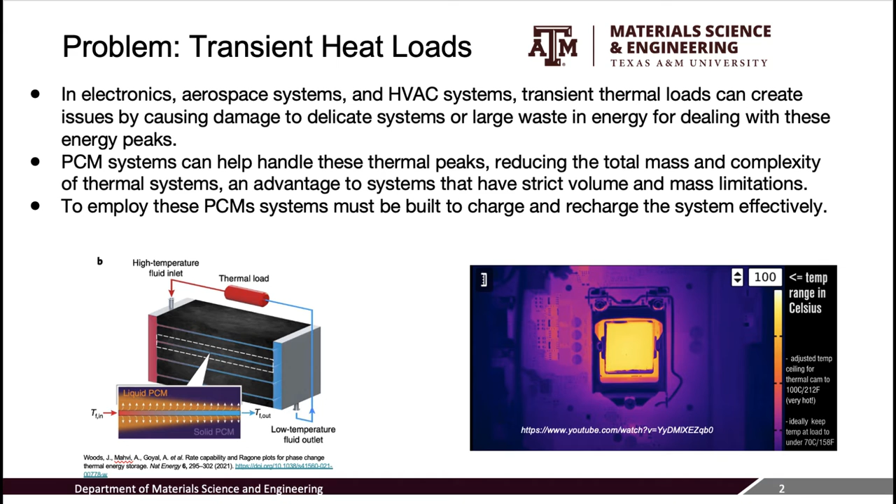We will be using the Thermal Energy Storage Module, or TES for short. It will be made of PCM composites, which are good for dealing with unexpected heat loads as mentioned previously. They are capable of absorbing excess unnecessary heat and releasing that heat when the system doesn't need the entirety of its cooling capacity. We are expanding on CITMAV's initial work on the storage unit and simulating optimal conditions in a much shorter time frame than physically building the module. We have much more room to change the variables often to optimize our results for a variety of different circumstances.

It is important to mention that we are just working on the TES module of this whole system, which is shown in the red box. The image on the left is a real-life model of the image on the right.

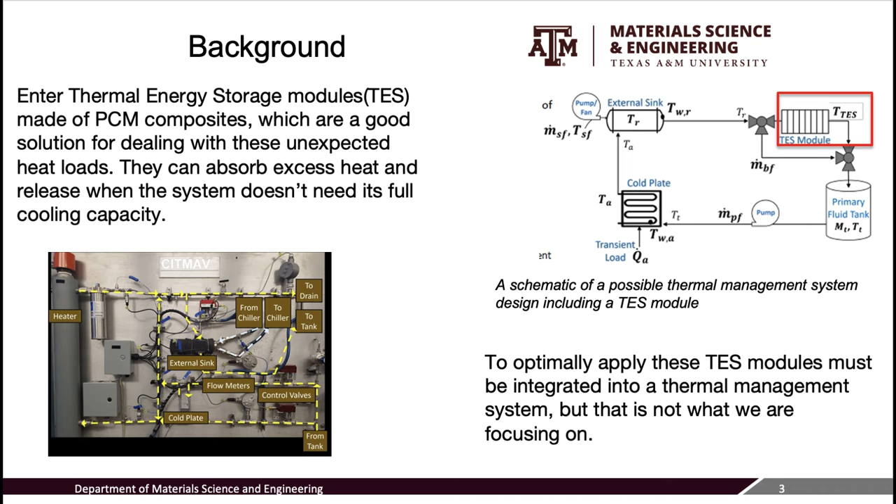We will be showing that there are optimal designs for these modules at specific timescales and heat loads. By designing with optimization in mind, we can minimize wasted resources.

It is also important to mention that the image on the top left is an example of the model we are planning on creating, including the metal fins in the fluid channel. These metal fins absorb heat particularly well as they are made of conductors. This helps move the heat into the system efficiently.

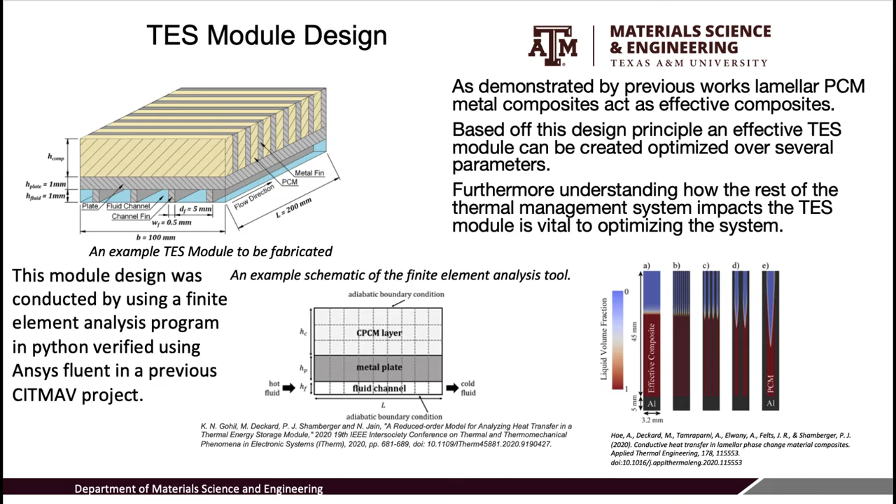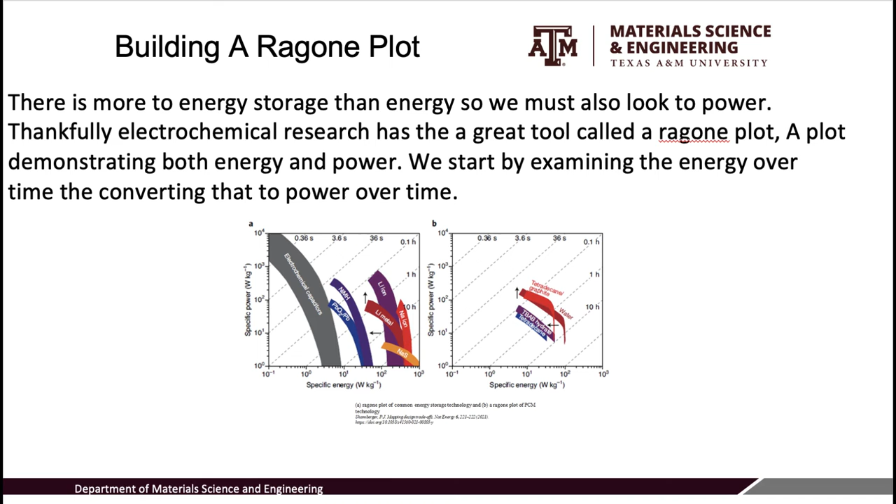An essential part of optimizing our system is understanding Ragone plots. Our system has more energy storage than it does energy being put into the system, so we must also understand and visualize the impact of power on our system. Ragone plots give us the ability to look at the relationship between energy and power easily.

This is the list of our conditions for our initial system. We started out with hexadecane as our PCM and aluminum as our metal conductor. It also has a flow rate of 0.2 kilograms per second and a difference of 5 degrees Celsius between the melting point of hexadecane and the inlet temperature. We use a 1,000-second timescale and rectangular geometry, which is 20 centimeters long and 10 centimeters wide.

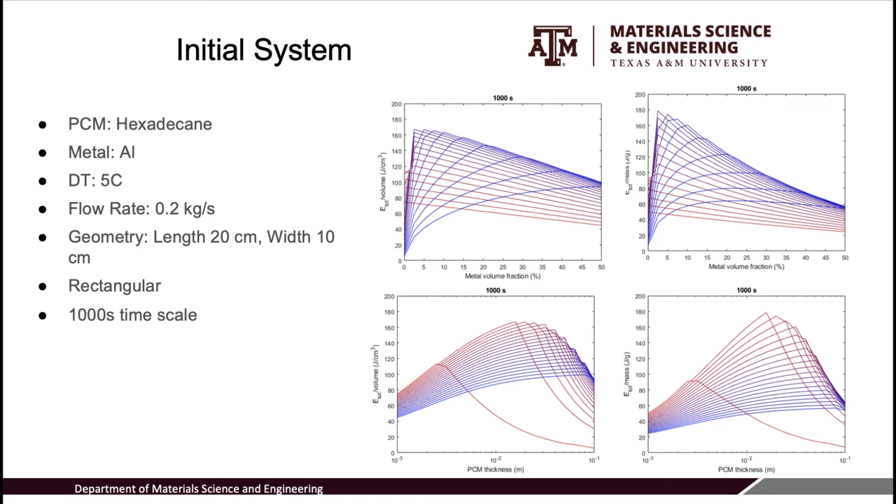We created a multitude of graphs that emphasize different design traits. Shown on the left is a mass-dependent Ragone plot of hexadecane and aluminum, color-coded by 0 to 50% metal. As you can see, there are these little colored groupings that are each a thickness group, and the yellow vertical line is the maximum energy possible. The plot on the right highlights the 4 mm thickness and gives us a clearer picture of each thickness by highlighting it individually.

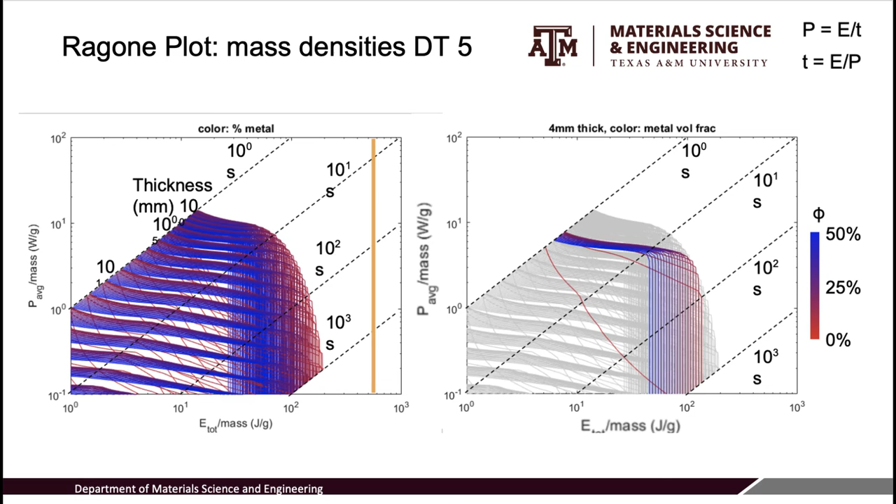Moving forward, we'll be looking at a variety of systems so that we can determine optimal conditions. So far, we have only looked at one material system, but as in electrochemical research and other work, other materials are available for comparison. This figure of merit, shown on the bottom right, is highly related to conductivity and is proportional to the heat flux in the case of constant temperature.

We will continue to look at hexadecane with aluminum at different temperatures, but we'll also look at it with copper and graphite. We have also looked at lithium nitrate trihydrate with aluminum, copper, and graphite at different temperatures along with gallium.

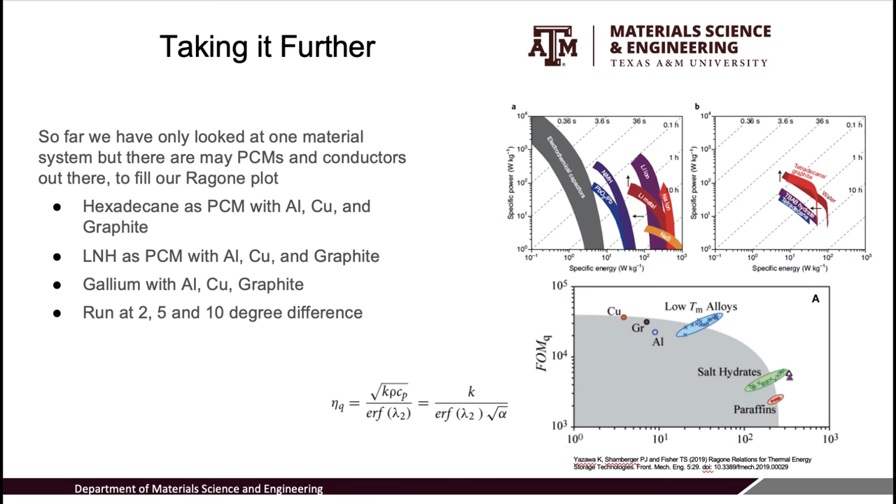There are 4 main comparisons we need to make to optimize our system. First, we will compare the temperature differences, then the different PCMs with mass dependency and volume dependency in mind, then the different conductors, and finally compare mass versus volume dependency.

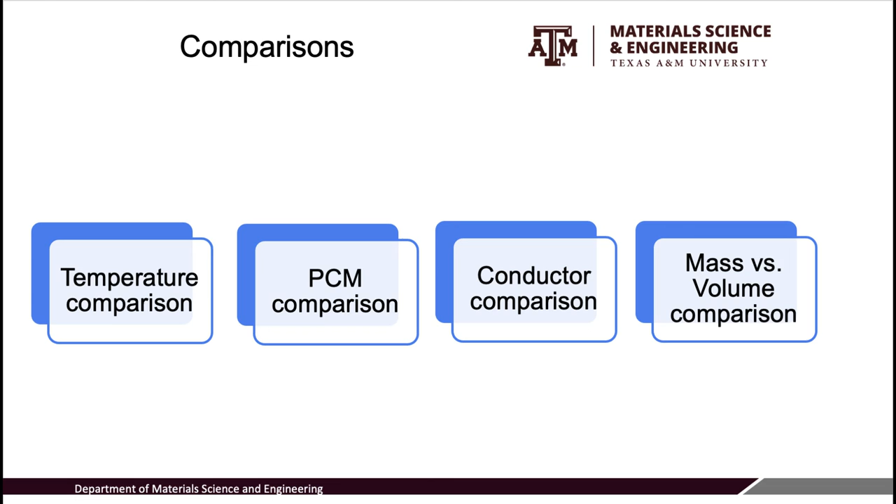Most of our energy is latent heat with minimal sensible heat. This latent heat is entirely reliant on the mass of our PCM, so with constant PCM, our energy does not change much. This is not the same case for power.

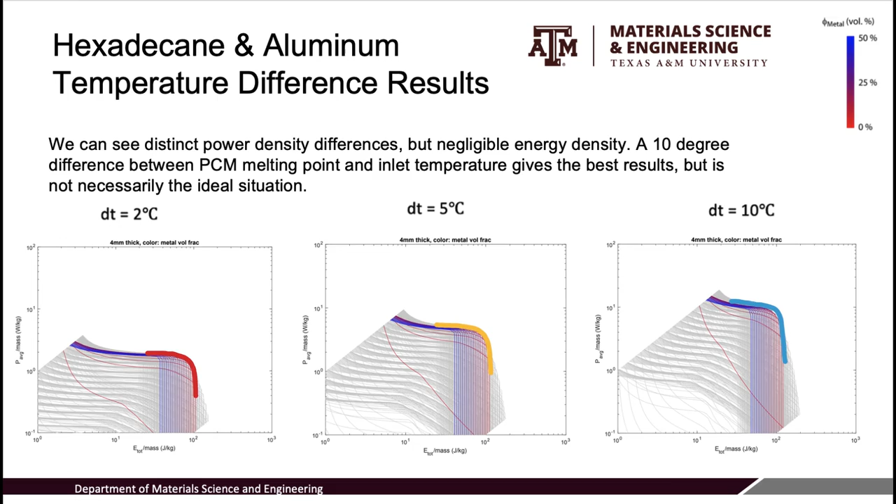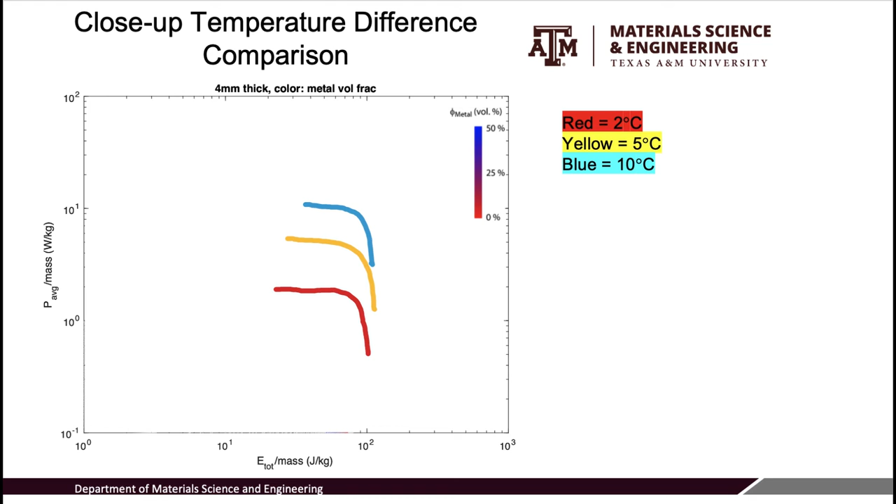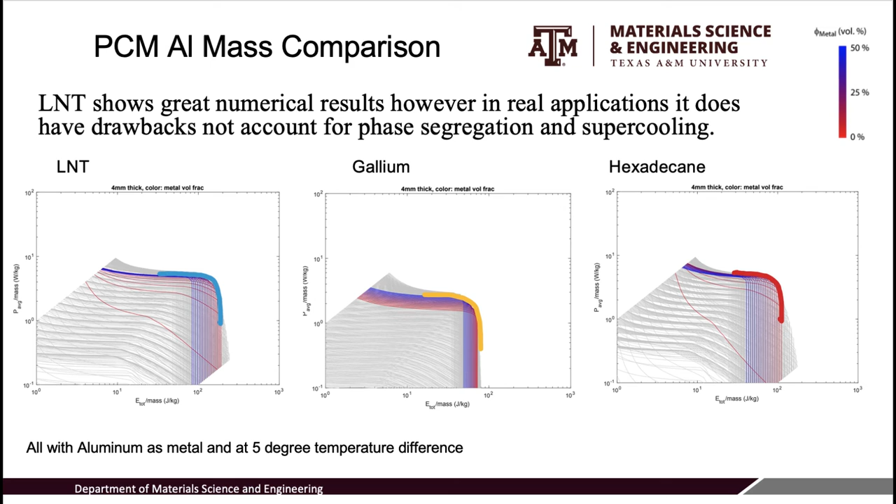However, it is important to note that lithium nitrate trihydrate does not do well with phase segregation, corroding, or supercooling. This makes it not particularly ideal for our situation regardless of the numbers.

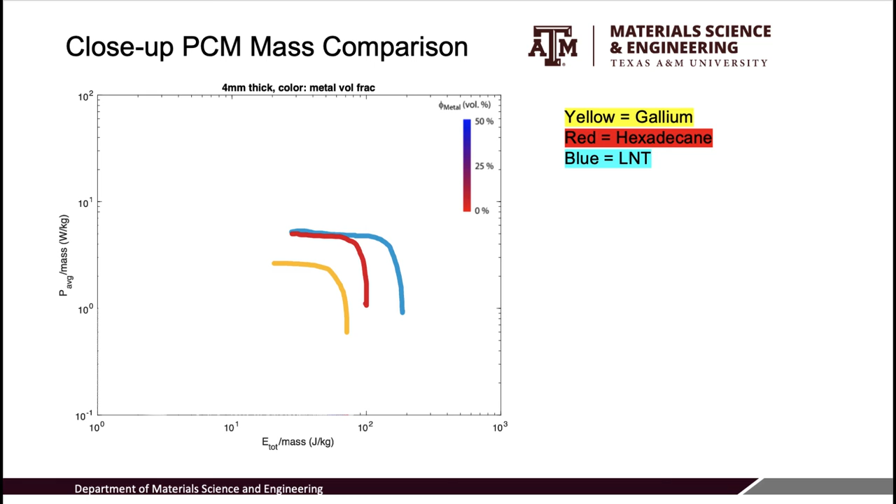Under the same circumstances as the last graph, but with the volume dependency being highlighted, we can see different results. I will talk more about these results shortly.

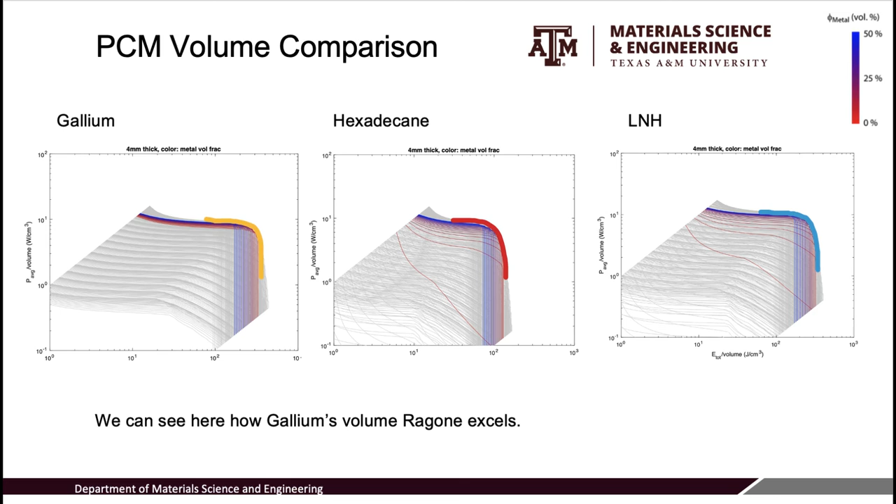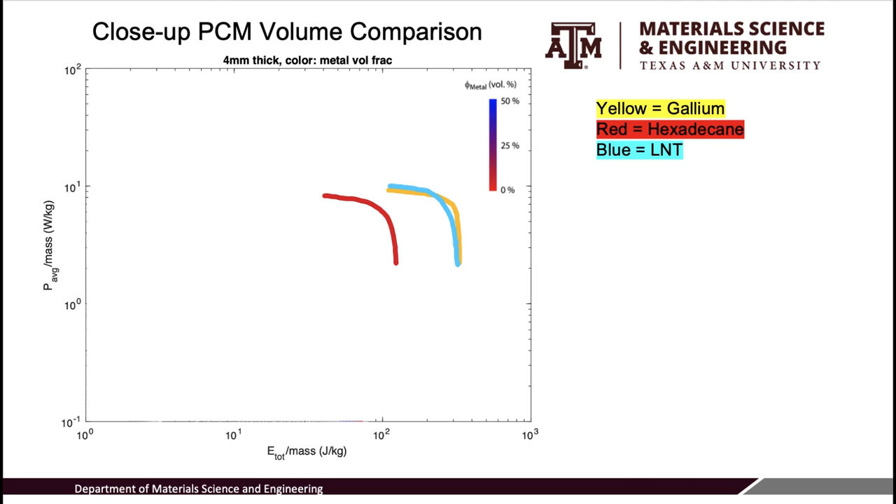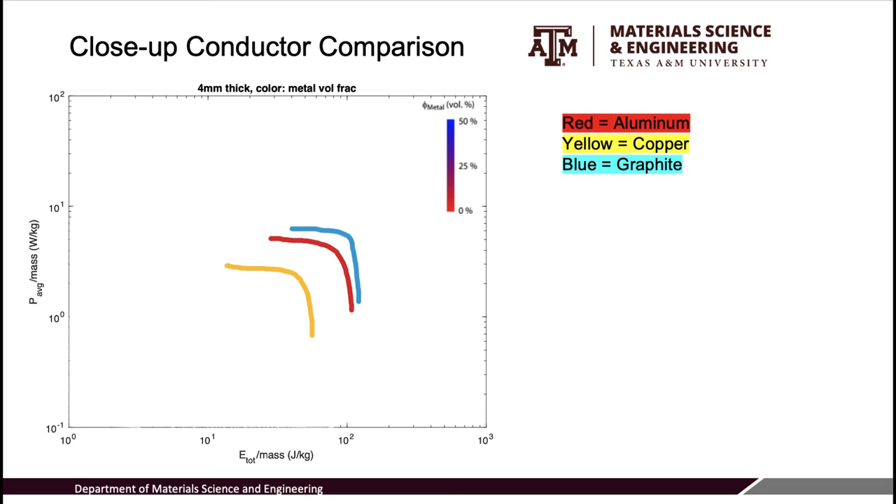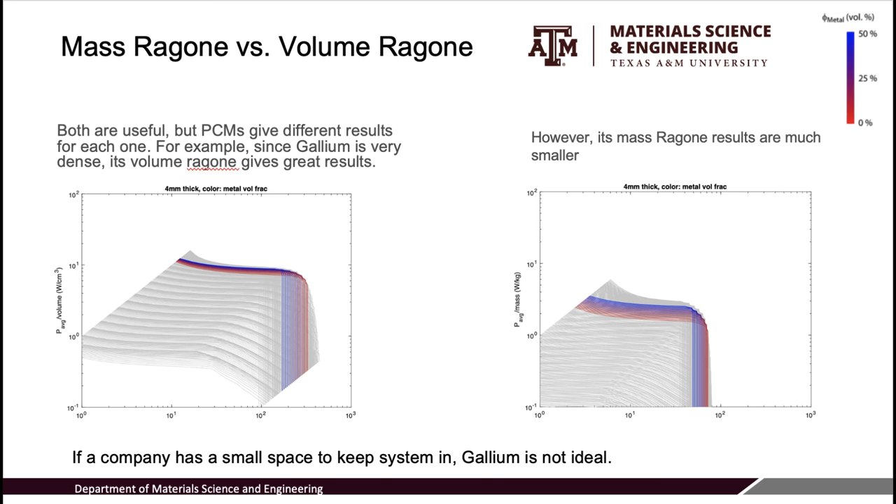I have made a couple tentative conclusions. Volume-wise, a system with gallium as the PCM and graphite as the conductor with a 10-degree temperature difference is ideal numerically. However, realistically, gallium is expensive.

We need to do more research on graphite and what kind of configuration we want it to have, because that changes the thermal conductivity. And this system would not work well in a space-limited environment.

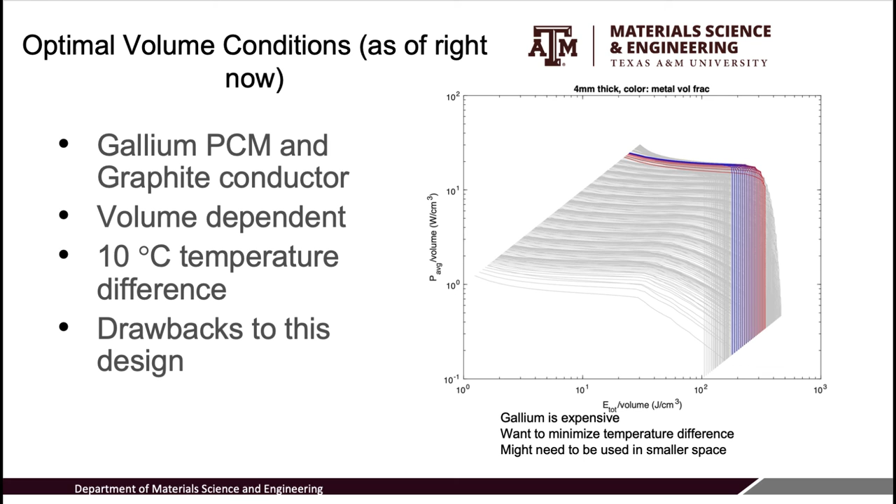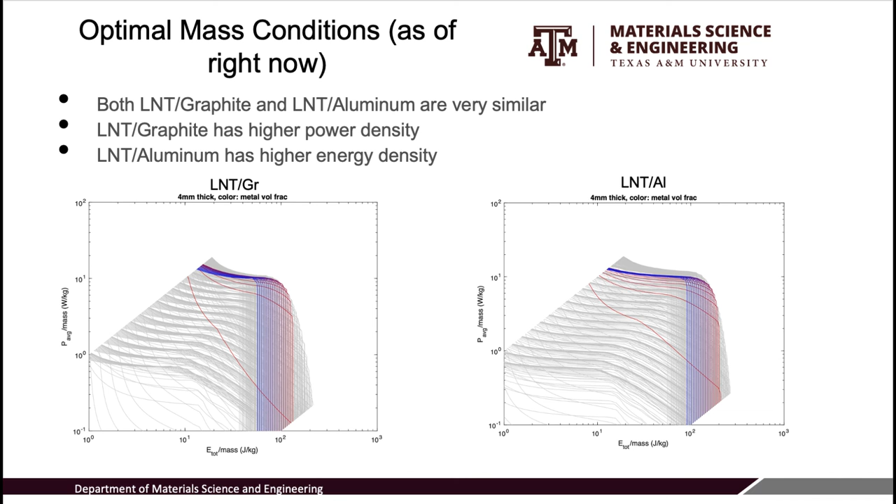Mass-wise, it is close between lithium nitrate trihydrate and aluminum, and lithium nitrate trihydrate and graphite, with a 10-degree temperature difference. There are pros and cons to each component in each system, and they need to be studied closely to determine which one is better than the other.

There is still a lot of research that can be done and will be done in this topic. There are different model geometries, such as cylindrical and spherical models, that need to be researched.

There also needs to be more research on what kind of graphite configuration is realistically ideal for this system, as mentioned previously.